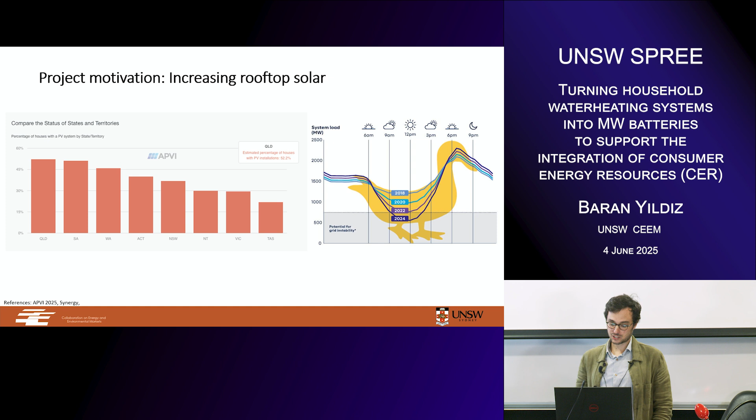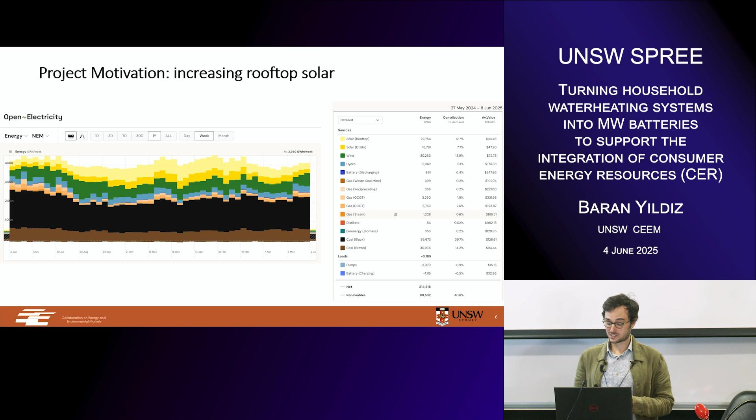If you look at this slide - this is from Open Electricity, a wonderful open source tool developed by one of our team members, Dylan. With the yellow colour, you'll see the generation coming from rooftop solar over the last 12 month period. Rooftop solar has contributed 12.7% to electricity generation, and we have utility scale solar as well with 7.7%. So overall more than 20% of generation is coming from solar only, plus we have wind and other renewables. This is just a little insight into what's coming ahead as we have more and more rooftop solar.

And this is all great that we have many rooftop solar systems now. So I'll just share a couple of challenges brought by this high level of ownership of rooftop solar. In South Australia, there are various times throughout the year where rooftop solar actually provides the entire electricity demand of the state, and they need to export the excess to neighboring states through interconnectors.

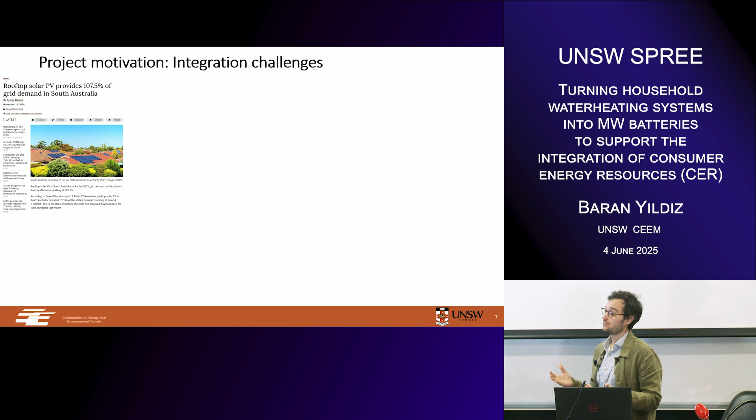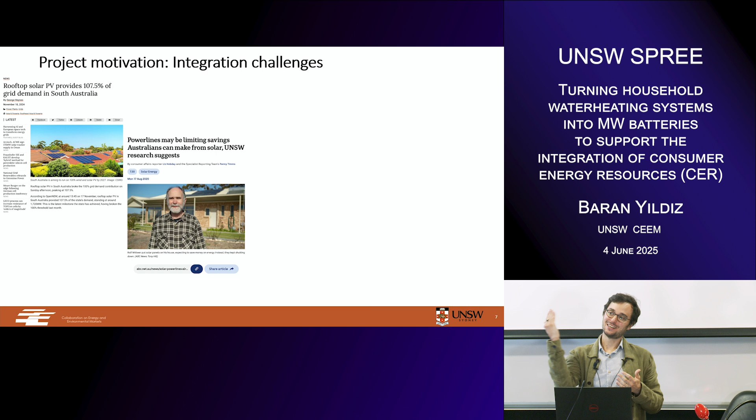This can create certain network and power system security issues, especially in the events of network disturbances and if the state is islanded. We have worked on various issues regarding rooftop solar and voltage increases in the distribution network, because voltage rises as more and more rooftop solar exports electricity in the reverse direction. We've done quite a bit of research in this space, and we see rooftop solar being curtailed - the output reduced, or systems completely shut down - due to some of the inverter power quality response modes, which is dictated by Australian standards. We've worked in this space and identified some households losing more than 20% of their generation due to curtailment.

And then comes emergency backstop measures. This can be thought of as a red button, dictated by AEMO, which they can push to give signals to various distribution network service providers, who then, through different third-party agents and communication platforms, can shut down rooftop PV systems in their entirety, especially relevant for the newly installed fleet in the last couple of years.

So there is a lot of controversy around this topic. Do we really need these emergency backstop measures? Can we have smarter solutions perhaps to prevent shutting down all of the rooftop fleets in our national electricity market?

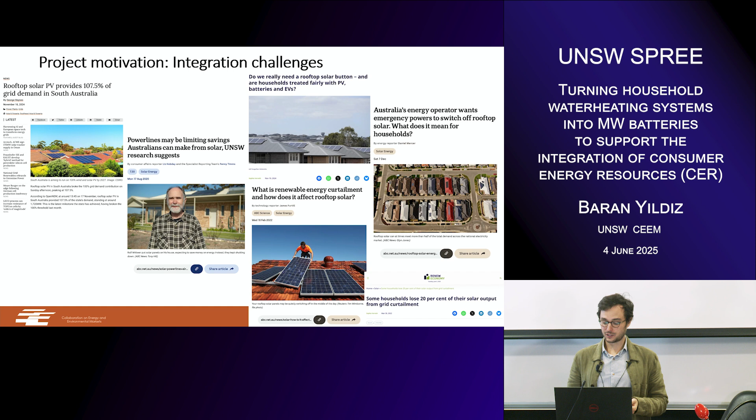So these are all the integration challenges that gave motivation to this project. As we've seen, exports are in some parts of the network creating problems, as well as also benefiting many users in various different ways.

Energy storage is an obvious solution to this, right? We can store the excess solar during the day and then use it at other times, perhaps peak demand periods, to also help networks as well.

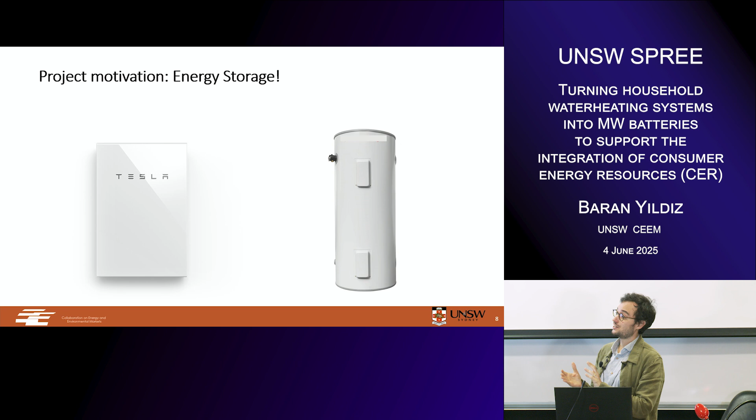Now I've shown in this slide two different types of energy storage. You can see the famous Tesla Powerwall, a lithium-ion chemical electric storage technology, and a thermal storage technology with a 315-liter water storage tank. So now let's just compare these two options.

With Tesla Powerwall, we have around 13.5 kilowatt hours of storage. Depending on the size of the storage tank, you can have 10 to 15 kilowatt hours of thermal storage, using MC delta T, based on the temperature difference between the input temperature and the temperature we use in our houses.

Obviously, Tesla Powerwall can be used in all electric appliances, whereas the water storage tank is only for water heating applications. We have probably $10,000 to $11,000 of installed costs, including a $2,000 rebate in New South Wales, for a Tesla Powerwall. On the other hand, these water heating systems are $1,000 to $2,000.

In terms of ownership, Tesla Powerwall, or batteries like it, are owned by around 250,000 households. Around 4 million households have electric water storage tanks. Typical lifetime is 5 to 8 years for a battery, whereas 10 to 15 years for thermal storage. You can see the energy efficiencies as well, and both can utilize rooftop solar.

So hopefully by the end of this talk, you will be able to identify which one is the low-hanging apple in this instance.

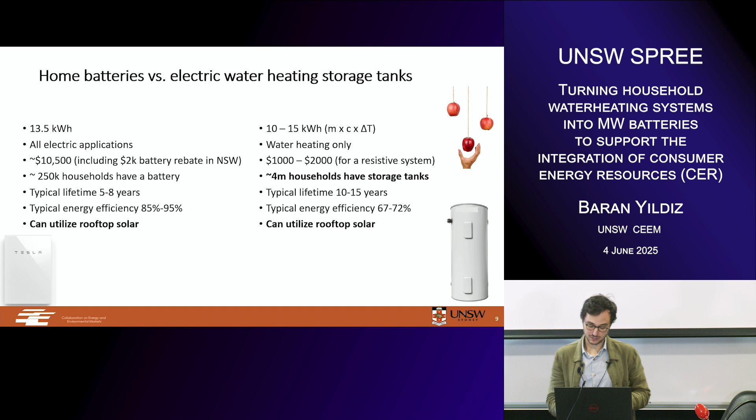Can I get a raise of hands if you have an electric water heating system in your house? This might be resistive or heat pump. Okay, great, thank you. Can I get a raise of hands if you have a gas system in your house? Thank you. So we have almost equal allocation, and the percentage changes most of the time.

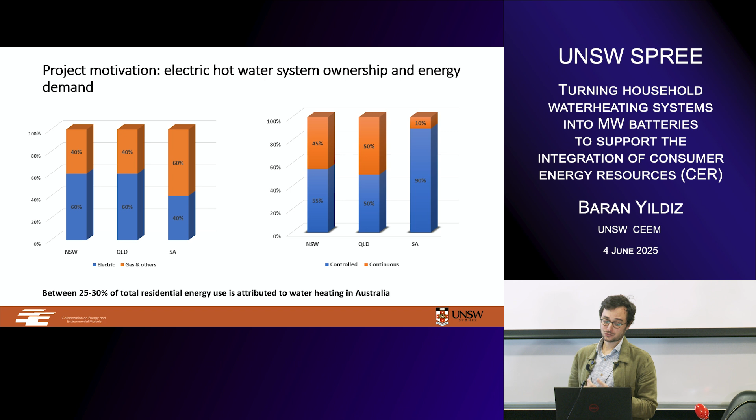We will get to the comparison of electric versus gas later in this presentation. But an important pointer is that around 25% to 30% of total residential energy use is attributed to water heating in Australia. So it's significant potential.

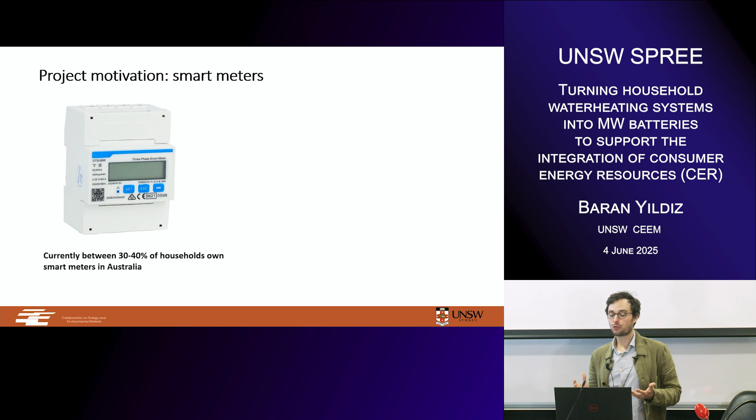The other part of the project is that at the moment we have around 30 to 40% ownership of smart meters in households. The Australian Energy Market Commission, AEMC, projects that by 2030, every household in Australia will own a smart meter. So smart meters provide more granular monitoring of your energy usage.

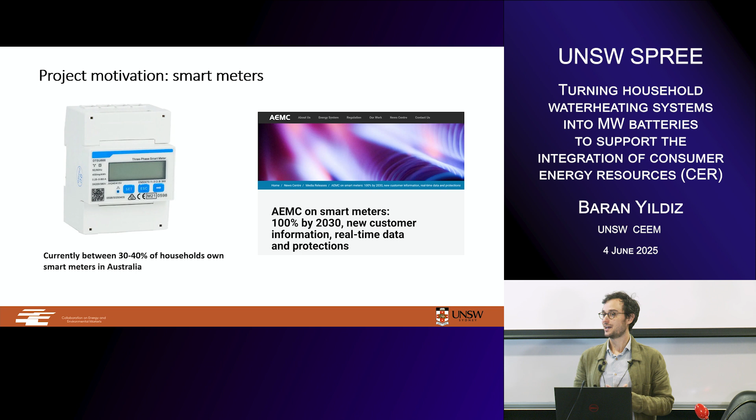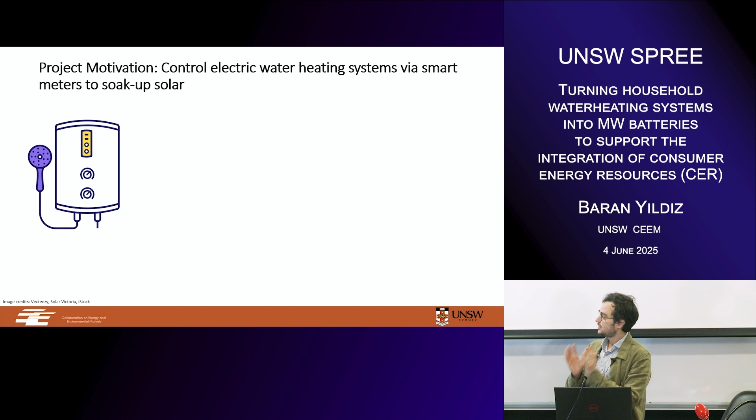Also, smart meters provide the ability to control different circuits remotely compared to old mechanical metering. So now let's bring all of these different components together. We have water heating systems, with significant storage potential and large ownership across Australia. We've mentioned rooftop solar systems increasing, and we are the global leader, as well as smart meters being installed in our households.

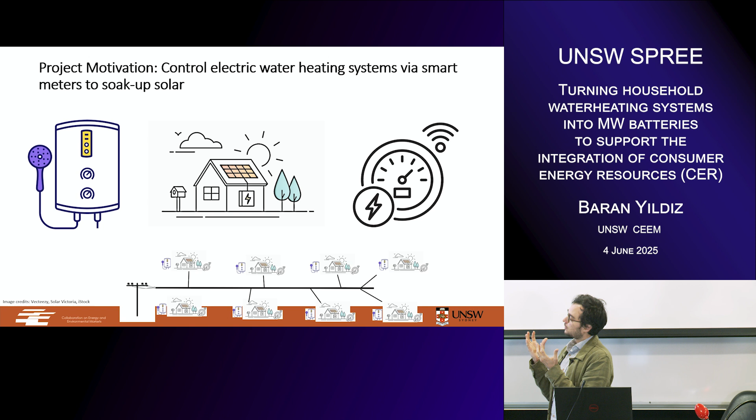So this is basically the whole three components of the project: using smart meters to control electric water heating systems to soak up excess solar in households as well as in the distribution networks, as much as possible.

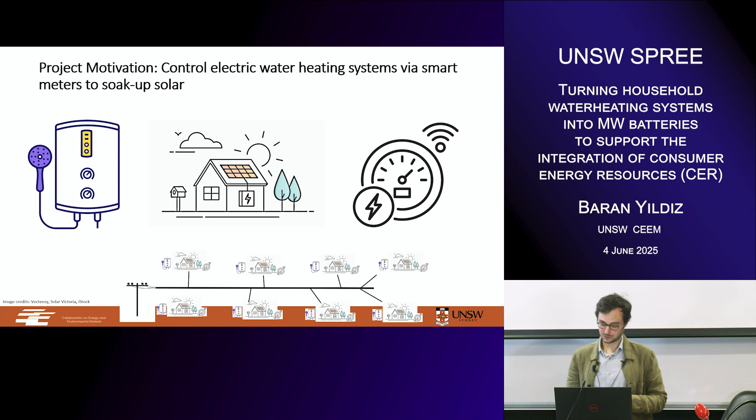Okay, so now that I've explained the motivation of the project, I'll be sharing some key insights from two real-world trials that we worked on. The first one is in South Australia, with the metering provider Plus ES, and the trial was called the Flexible Demand Trial. It included around 20,000 households. The other one is in New South Wales, with Endeavour Energy.

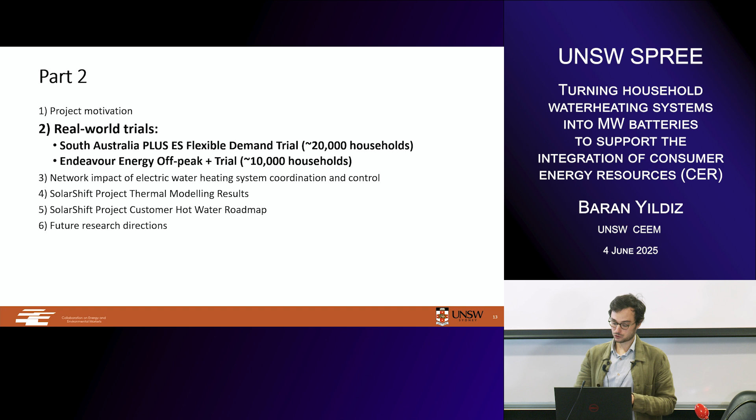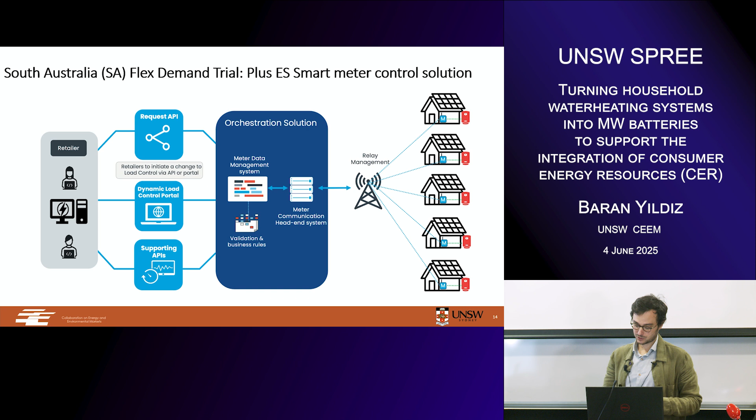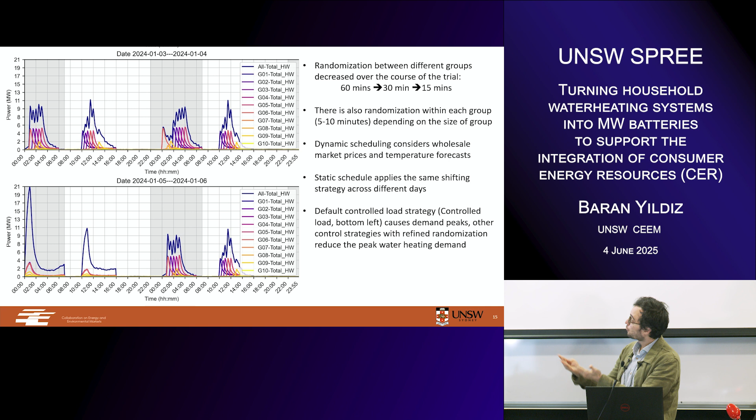What you can see is that on some of these control instances, there is randomization, so the tanks are turned on with a predetermined schedule rather than all at the same time. This randomization was done at 60 minutes initially, then refined to 30 and 15 minutes. There is also randomization within each control group, because we've seen this example in South Australia before where turning all tanks on at the same time creates peaks in the network, causing price spikes and other problems. We've learned the lessons, so we're organizing different randomization schedules to create a smoother demand profile.

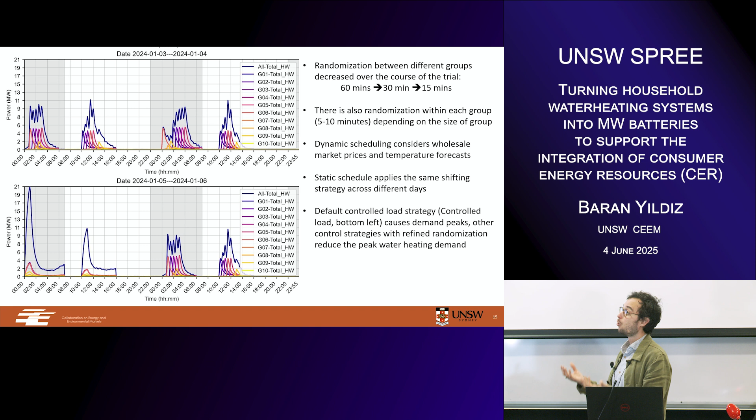On the bottom left, you see when there is no randomization, demand goes above 21 megawatts for this fleet, whereas with randomization it's mostly below 10 megawatts. Within this scheduling, especially during the daytime, there is also consideration of wholesale market prices, so the retailer partner is trying to optimize system operations based on market prices for more financial benefits.

A few summary points: around 20,000 households, each with electric water heating systems connected to control loads. That was the old way of managing these water heating systems through the NSPs, using a separate designated electrical circuit. What we found in this trial was that around 25% of households had actually disconnected or moved on to other technologies, so they were not using the control load circuit. This is a significant finding.

There are reasons for this: if your water system is controlled by a third party through a separate electrical circuit, you cannot make use of your own solar directly. It's actually much more financially beneficial for users to self-consume their solar behind the meter. People have become aware of this, and they've basically moved from the control load circuit to the general supply, where they can soak up their solar behind the meter.

Throughout this trial, we tested different control strategies, static and more dynamic, showing different percentages of water being shifted to the daytime. On average, 45.5% of water heating demand was shifted to daytime during solar generation periods, and with the most recent strategy it was around 50%. So half of the water heating demand is being shifted to daytime to soak up solar in the network.

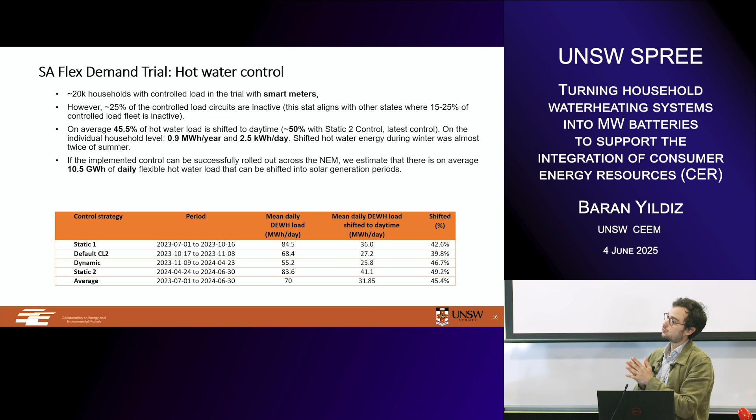Let's put this into context. According to recent data from the Australian Energy Market Operator, there is an average of 6.3 gigawatt hours of utility scale solar curtailment daily. If we include wind, it's around 11 gigawatt hours of daily curtailed renewable energy generation, which is practically lost energy. It's also very cheap.

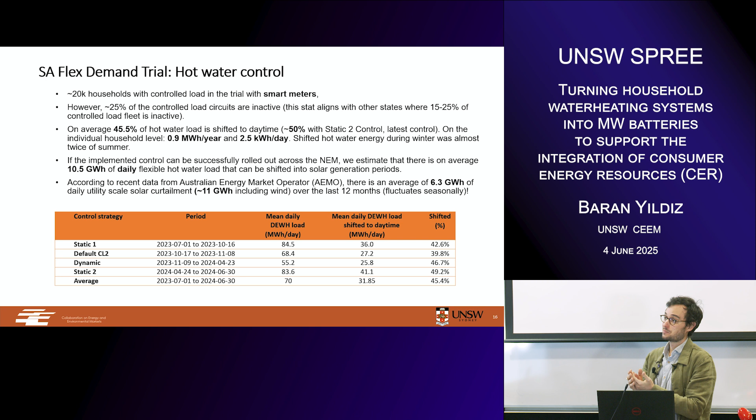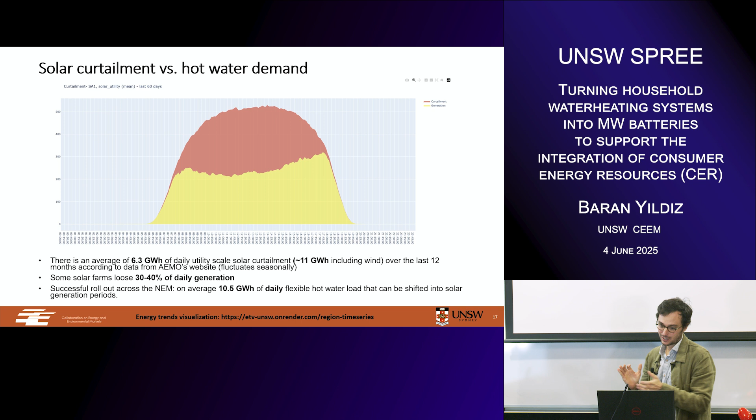You can see this plot from the Energy Trends Visualization Project developed by CEEM, showing the curtailed proportion of a utility scale solar farm in South Australia in red, and the generation in yellow. I don't know how I would feel if I was the owner of this solar farm. There is a really direct match between the shiftable electric demand of hot water and the daily curtailed generation, which is lost and practically free. Some solar farms can lose up to 30-40% of their daily generation, and we estimate around 10.5 gigawatt hours of daily flexible hot water demand can easily be provided by this lost energy.

Now we'll move on to heat pumps. This is becoming a more and more popular technology for heating water. Heat pumps work like refrigerant cycles, utilizing the latent heat of ambient air, which makes them more efficient, though their efficiency changes based on climate and temperature. These systems are becoming more popular these days, and governments are giving incentives and rebates for heat pumps.

What we've seen in this trial is that heat pumps also work with these control systems we've developed, but with one caveat: heat pump manufacturers do not recommend external control of their systems. They prefer these units to operate by themselves without someone turning them on and off, and there's a reason for it. Their claim is that external control may damage compressor life cycle. This depends from manufacturer to manufacturer, but based on conversations with three big heat pump manufacturers, that's their view.

I'd also like to show you some different operational profiles on heat pumps. You can see the blue one, or the purple one, on this plot—heat pumps have much less power consumption compared to resistive systems. They also operate over longer periods as well.

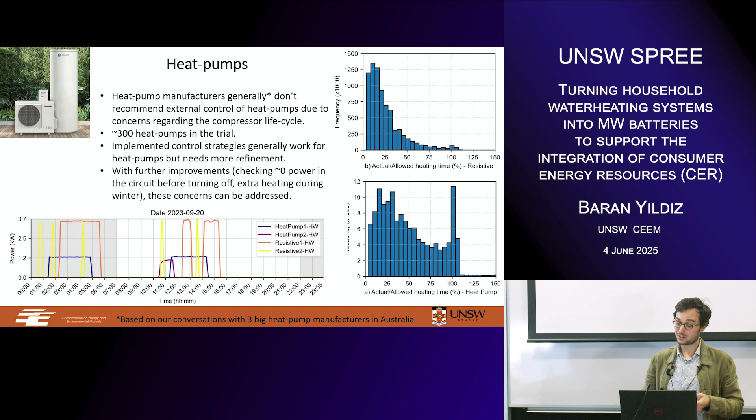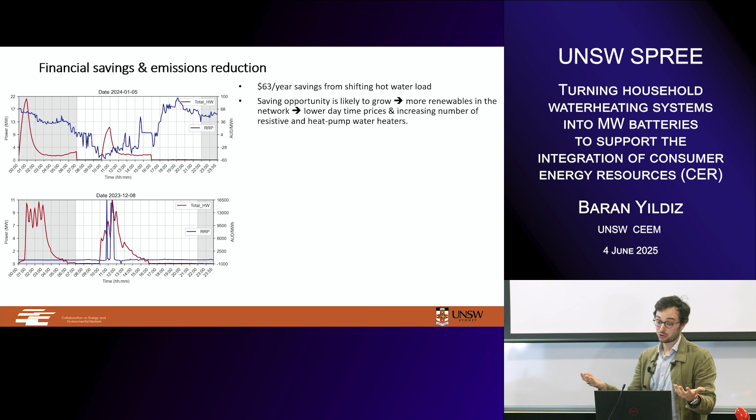I'd briefly like to summarize the financial savings and emissions reduction. We've estimated around $63 per year in savings from shifting hot water from nighttime to daytime. This opportunity is likely to grow—we already have lots of free wasted energy in the network, and it's going to increase as well. So daytime prices are likely to get lower, meaning there's even more motivation.

On this plot on the left, the top one, you can see a successful hot water shifting with the red line here, overlapping with the low wholesale market price from that region of South Australia. This is quite a profitable operation for the retailer.

On the bottom plot, on the other hand, the shifted water energy somehow aligns with the price peak in the middle of the day. So it's not always foolproof, but generally there is a good amount of financial benefit that can be gained from shifting water demand from nighttime to daytime where prices are lower.

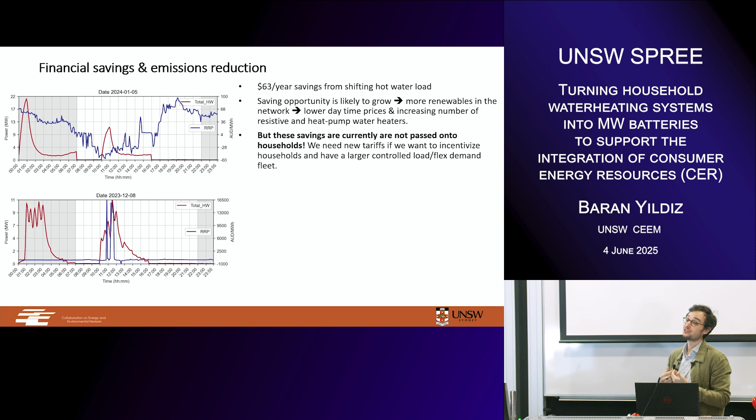Unfortunately, these savings are not being passed on to households just yet, because we have the retailer sitting between the wholesale market and households. But through conversations with the industry, we're really encouraging retailers to offer cheaper daytime tariffs so that people can benefit more from solar in the network.

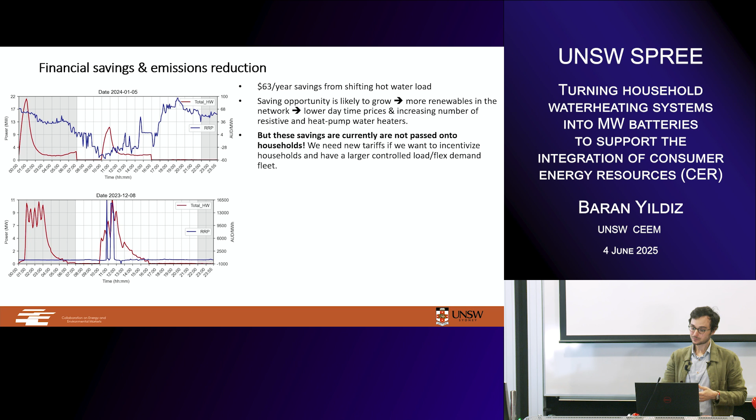We've seen a couple of retailers actually starting to provide free daytime electricity—in Queensland, and a couple of examples in New South Wales—so it's becoming more and more popular. This will, by default, encourage people to shift more demand into the middle of the day. If we can increase that demand, then perhaps there's not much need for curtailing and stopping rooftop solar generation.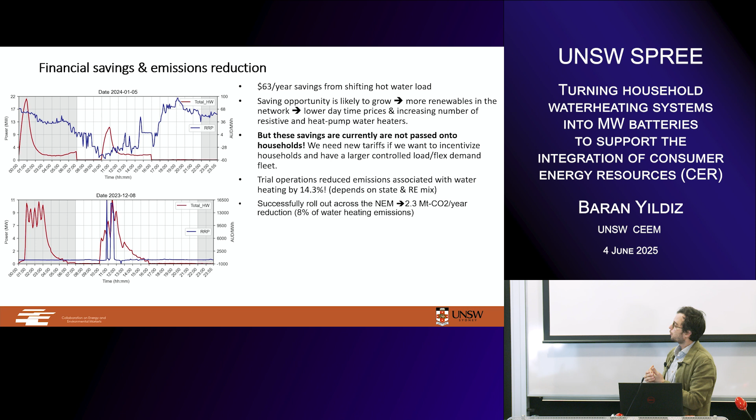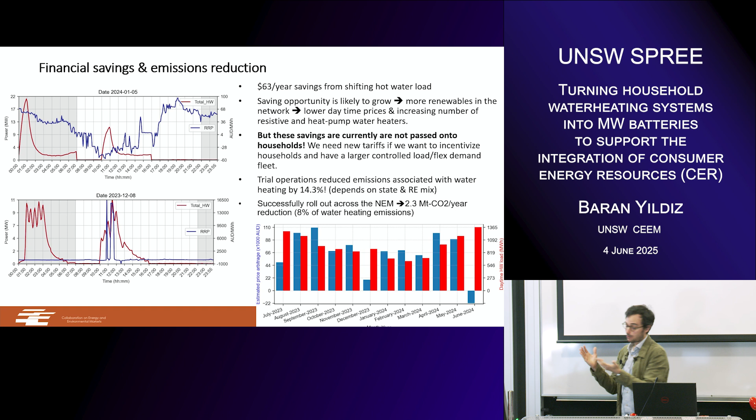We found that the associated emissions with water heating were reduced around 14.3%, and this highly depends on the state and the renewable energy mix there. If we could roll this out successfully across the NEM, 2.3 megatons of CO2 per year could be reduced. The financial wholesale arbitrage changes across different months, depending on the wholesale market price and other generators.

Throughout this trial, when we look at the voltages, the reduction when hot water demand was shifted into the middle of the day was around 2.6 volts.

We've also looked at some critical meters. These critical meters experience voltages above 250 volts regularly, meaning they had risk of curtailing their solar systems regularly. For these households, the voltage drop was even more, around 3.4 volts.

We've also done some network power flow modeling. We wanted to look into the cases where, okay, what happens if people buy more heat pumps in the future, which has lower power rating? What happens if they stay with resistive systems? What happens? There's a bit of mix, depending on different solar ownership.

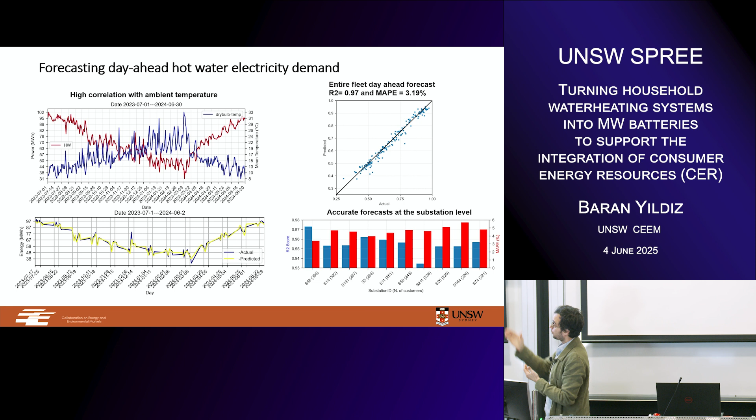So the good news is we can very accurately forecast the aggregate daily demand of electric water heating energy. And not only on the aggregate level, but we could also forecast at the substation level with high R2 square as well as really low mean absolute percentage error.

And one final piece here for the more on the behavioral side of things and consumer social science perspective. The retailer partner has carried out a survey with 18,843 customers participating in a trial, and only a very small percentage of them actually gave them a call saying we're having problems with our water heating system. So the trial from that angle was quite successful, and opt-out rate was 0.3%, so it was quite low.

So more detailed surveys were carried out, and from a couple of the participants we found out that as long as they didn't change their routine significantly, the trial was successful, and this new way of operating water heating systems, shifting them from nighttime to daytime, didn't cause any disruptions in their regular daily life.

Okay, so now we're moving on to some thermal modeling results. I'm aware also we have less time than allocated, so I might rush through this a little, but happy to take any questions if you have.

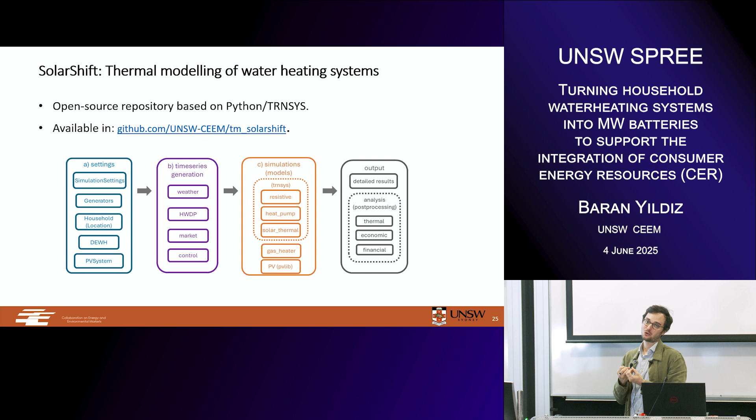So what we've looked so far, water heating systems in aggregate, we have tens of thousands of them. Now what we're looking here is the water heating systems at the household level, and we want to understand the thermal dynamics, thermal behavior of these systems.

In this project, we've looked at different technologies, resistive heat pumps, gas heaters. Quite a few of us have gas systems. Instantaneous ones as well as the storage. We also looked at solar thermal collector.

We wanted to consider the effect of household behavior, whether you are a working family, whether you're retired, whether you're a night shift worker. So we've modeled different water draw profiles, and we've also done this analysis for different states, for different number of people and different network and retail tariffs, as well as different control strategies, the older control, the new control through the network companies, a solar soak only component, which our aim is to really get most out of excess solar, so limiting the water heating just to the solar soak periods.

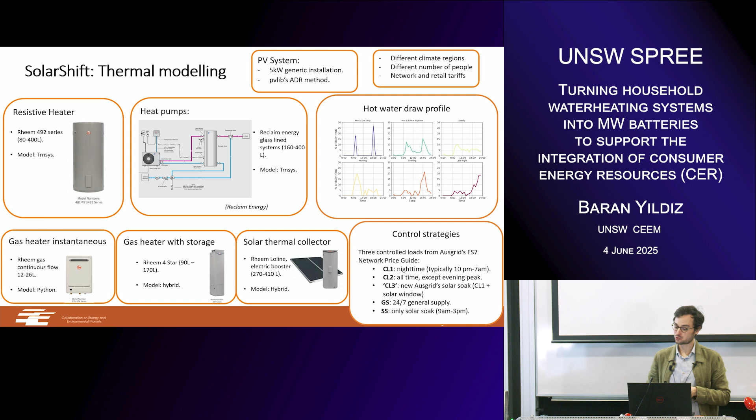Now I'll just summarize the key findings. One of the key findings, what we found, TRNSYS modeling, which is an industry standard for thermal simulations. This modeling was also used when we have written the Australian standards relating to the water heating operations, have actually shown us that the efficiency, the storage efficiency, so how we're defining the storage efficiency, the amount of energy we get out as useful water heating energy divided by the energy that we put in is around 67 to 72%. So you can see that there's a significant amount of energy being lost due to thermal losses.

So when we think about this, we know around 6 kilowatt hours is average electricity usage from an Australian household attributed to water heating, 2 kilowatt hours of that is being lost to ambient.

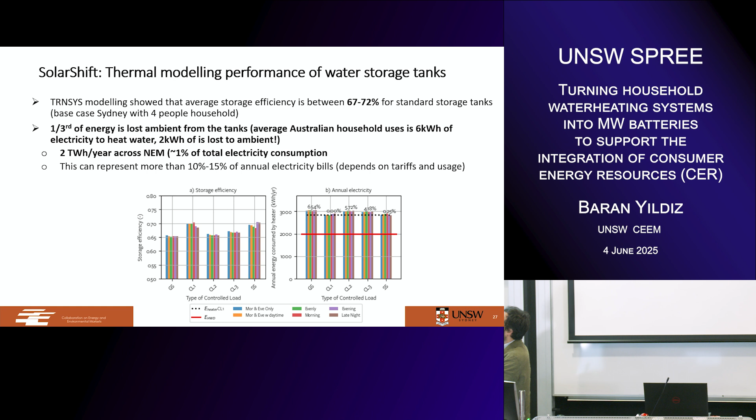If you're living in a freestanding house, you have a water tank outside whose insulation might not be as good. It's like turning your kettle continuously on and keeping its temperature high, losing lots of energy. This can represent 10 to 15% of one's electricity bill, depending on usage and tariff. This is an important finding. We've also classified different losses across different states and different types of control loads and usage patterns.

One key feedback here to our standards body is AS/NZS 4692. This standard is minimum energy performance standards for water heating tanks, and it's from 2005 and hasn't been revised since. We're now living in a different energy landscape, and we believe there might be motivation to go back and see if we can improve this.

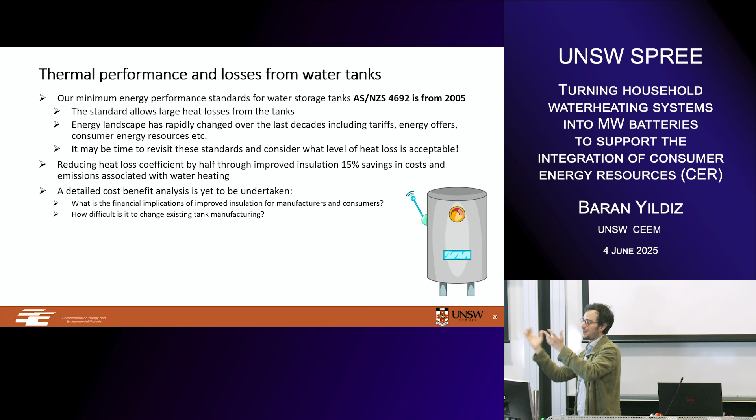When we improve the heat loss coefficient, if we reduce it by half through improved insulation, you can achieve 15% savings. However, we need to do a more detailed cost-benefit analysis. How much cost increase is this going to cause for customers? Can manufacturers fit the same amount of water without necessarily modifying the tank significantly?

So there's more work to be done, but significant potential for minimizing heat losses. We've done similar thermal modeling for heat pumps, and we wanted to look at their annual coefficient of performance - that's a term used for their efficiency. Heat pumps have a coefficient of performance around 3 to 5, depending on the region and quality. That means you give one input of energy and you can get 3 or 5 due to the refrigerant and being able to use the latent heat in ambient air.

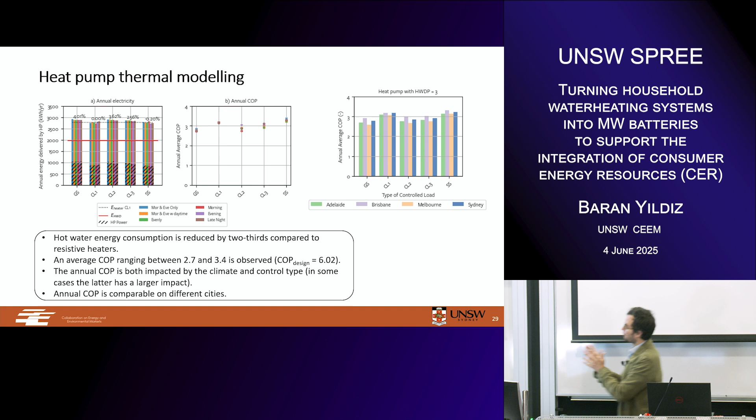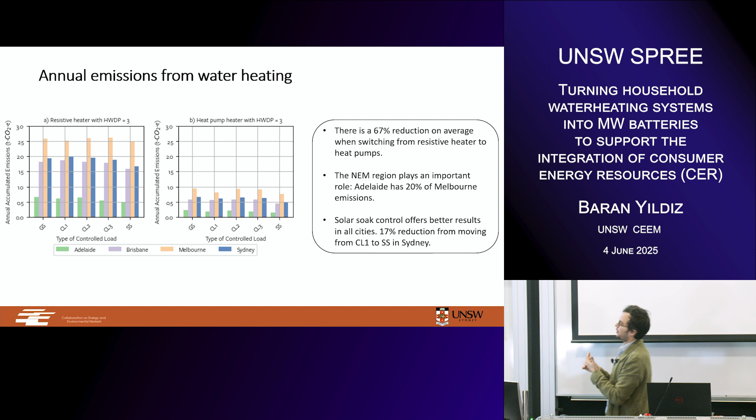We were able to look at how coefficient of performance and heat losses change for heat pumps based on these variables we've discussed. For annual emissions, when someone changes to a heat pump from a resistive heater, you see a 67% reduction of emissions. Obviously the NEM region plays an important role - for example, South Australia with very high renewables has 20% of the emissions you get in Melbourne due to water heating. That would also depend on whether you're using solar soak, solar consumption, or importing from the grid.

We've also looked into forecasting the aggregate level of water heating demand. Can we actually forecast individual household level water heating demand? Most of these water tanks do not own a water flow meter or a thermocouple, so they're like a black box - we only have their electricity measurements, so we don't know much about them. Therefore, we try to generate lots of different scenarios based on how many people are in the house, weather, and different user behavior.

And we try to estimate the state of charge of the tank. We've approached this from a probabilistic point of view, trying to create a distribution based on different scenarios of what is the likelihood of this household's water tank having a certain percentage of state of charge at this time of day. So we're trying to create some probabilities here.

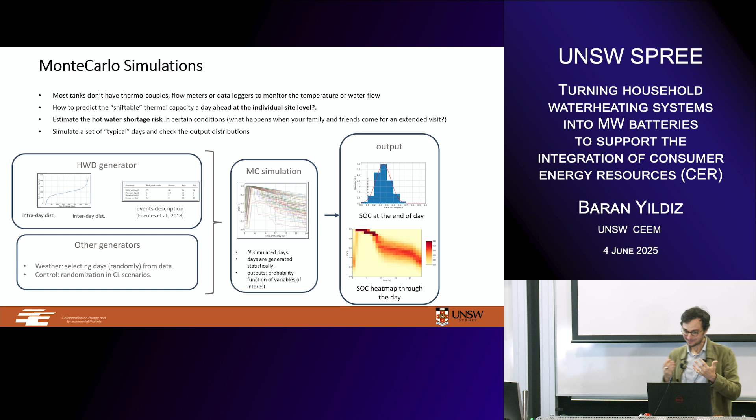Based on different usage profiles - whether you're using only morning and evening, or throughout the whole day - and based on different numbers of hours of heating and starting time, we've quantified the risk of running out of hot water. This is especially important because our ambition is to shift as much water heating demand into the daytime. We've looked into cases of what happens if we entirely shifted the water heating demand during the solar periods - does it ever cause any risk to you?

What if your in-laws came? What if your friends came over for a long stay and your water consumption went up significantly? So what we recommend is to include water heating windows in the early morning and late afternoon, which really minimizes the risk of ever running out of hot water when you're on the solar soak only water heating strategy.

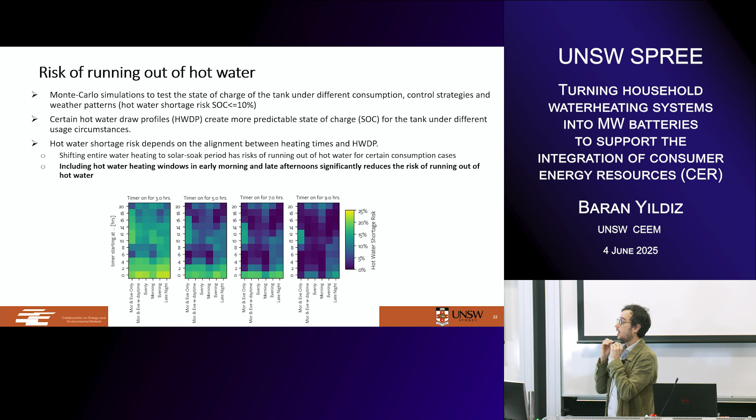Okay, we're running out of time.

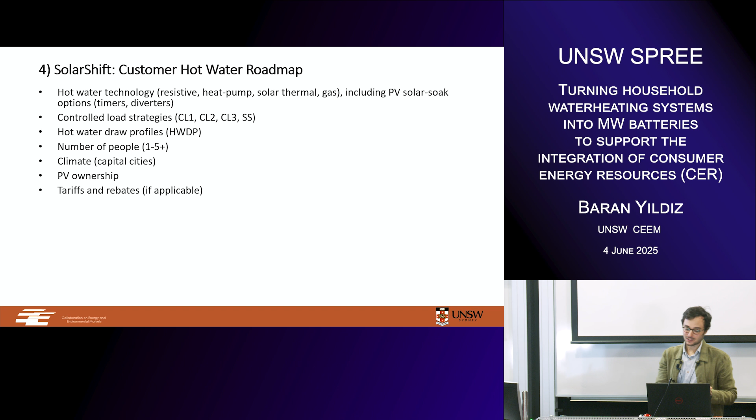So we've basically summarized all these outputs into an online-facing customer hot water roadmap tool. In this tool, household owners can type in their address, postcode, how many people are living in the house, and what sort of water heating technology they're using, and they can get an estimate of potential savings with different water heating technologies, emissions reductions, payback time, etc. We consider lots of different scenarios, including different capital cities, and now we've extended to different postcodes. Do you own a PV system?

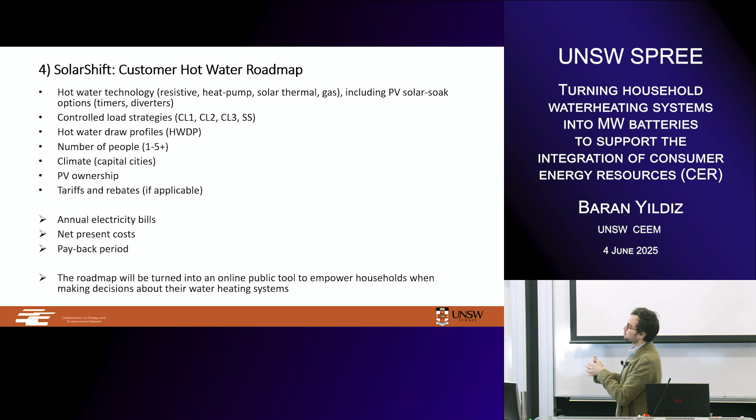What sort of tariff you're on, etc. So this tool basically compares resistive systems, heat pumps, solar thermal gas, and instantaneous storage.

If you have an electric system, do you have a PV or not? And what sort of control strategy are you on?

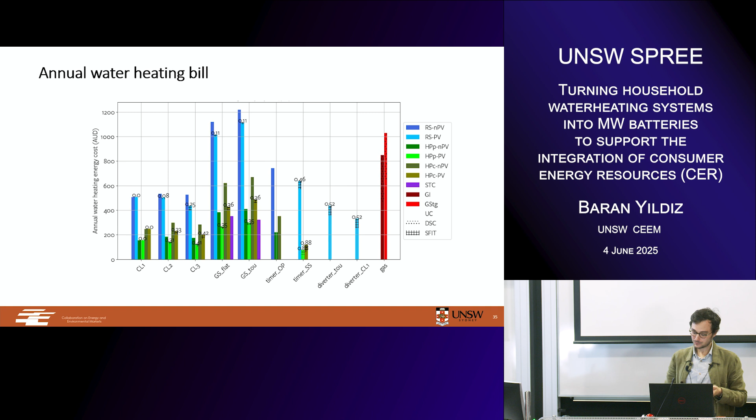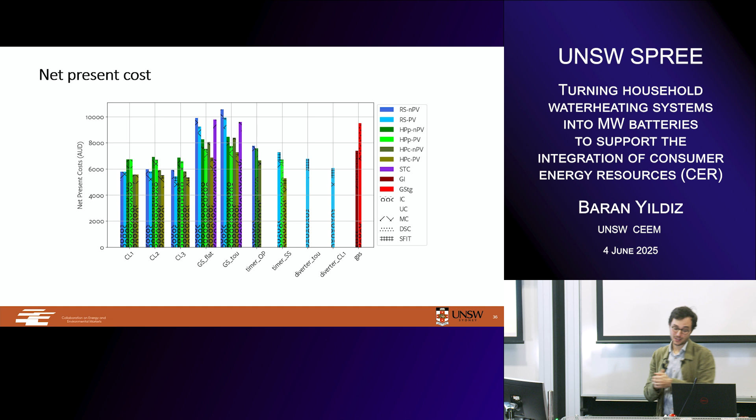So we can quantify your annual water heating energy costs, the net present cost if you're making an investment over a 10-year period, including initial cost, maintenance cost, and relevant rebates. And the payback period, if you wanted to shift from say resistive to heat pump, how long does it take to pay that investment back?

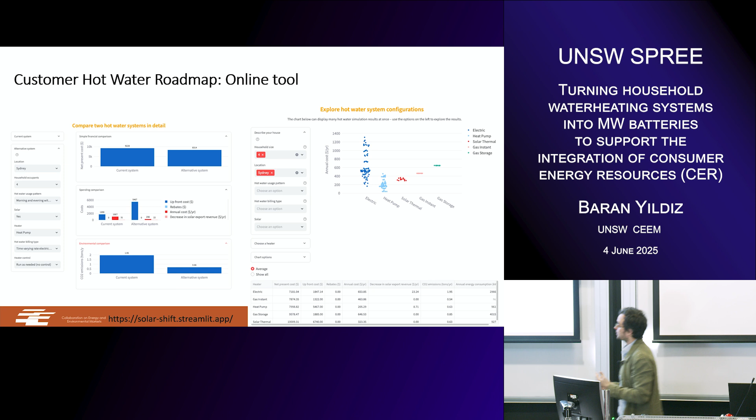On the right-hand corner, we're looking at different scenarios for 4 people in Sydney based on different usage patterns, how their annual costs and distribution may vary based on the different technology types. There are lots of different comparison options in this tool.

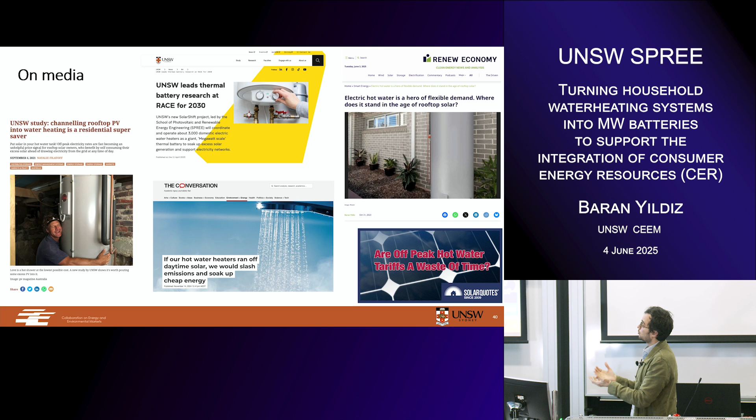Final section, I'll summarize our contributions through this research. We have got some exposure on media. Various channels have published our research and the findings from them, which was a good contribution.

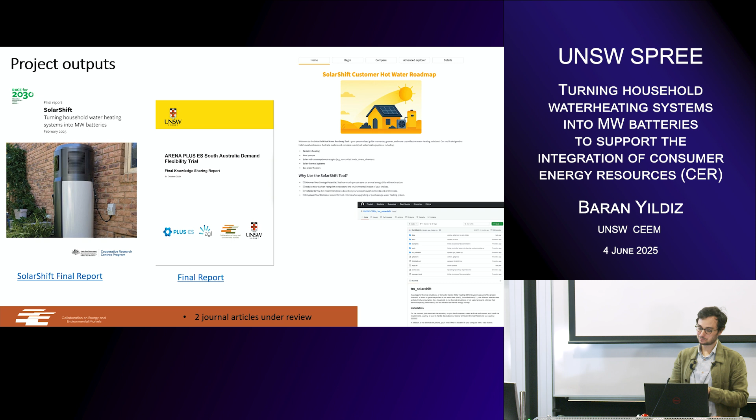Finally, we have 2 key project reports that are online, as well as this online tool that's available. We have an open source GitHub repository, so if you wanted to replicate or work this tool into different applications, it's available. We also have 2 journal articles under review. Now some future research directions, and then we're done.

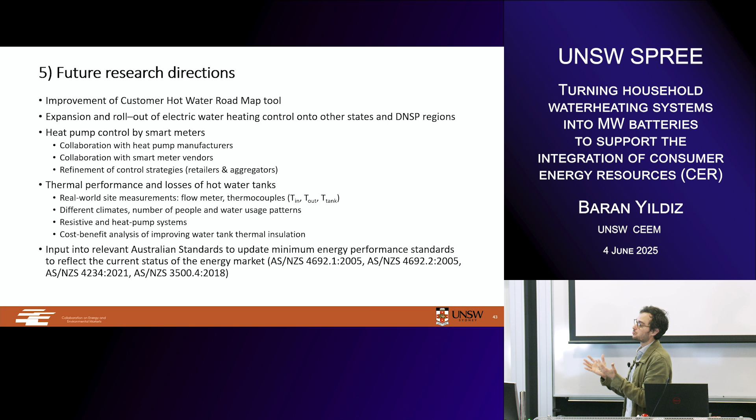We would like to continue improving the online customer hot water roadmap tool, and see the expansion and rollout of electric water heating to different states and DNSP regions. There's some room for improvement for controlling heat pumps, as I mentioned. We would really like to take these findings on thermal performance and inform Australian standards, to hopefully update relevant standards in this space so it brings energy savings to users.

Thank you very much for listening, and happy to take on questions if you have time.

Thanks, Baran, for a very different talk in the normal SPREE series of talks. Notable takeaways from me very quickly.

Large-scale solar farms out there have 30% curtailment. We can work as hard as we like on improving efficiency by a few percent, but the farms themselves are losing 30% of their output due to curtailment. So we need to shift the load. And when you shift the load to heat your hot water, you're losing 30% of the energy just in inefficient processes. So there's loads of ways we can improve the processes, and it's great to be looking at it at that level of detail.

Any questions? Comments? Maybe a quick one, Baran. Great presentation.

Just that curtailment of 30%, is that split into load balance and operational, or is it network restraints plus load balance? Mostly economic, but it also includes some technical curtailment as well, so it includes both. Most of that can be reduced through consumption.

Yes, so they're curtailing economically, meaning they don't want to pay to generate electricity. If we had higher demand, they might actually be able to generate. So the point is the electricity price goes negative, so you have to pay to export, and they choose not to.